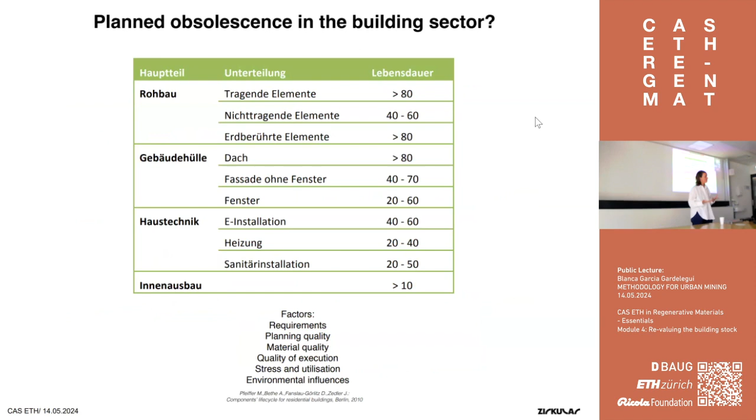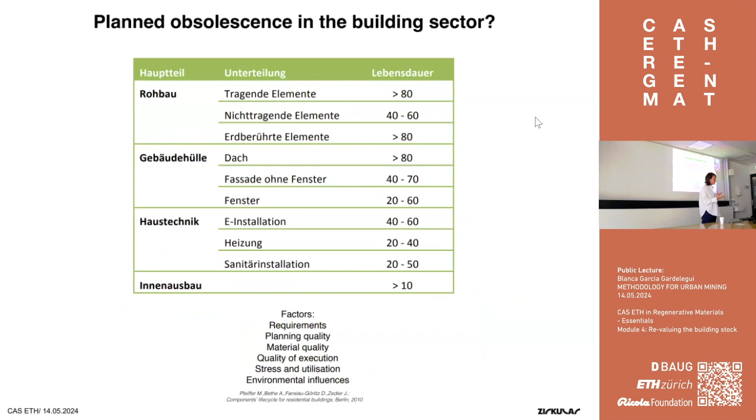A bit of the question where it all starts is extending the life cycle of components and materials. Our first question is, what is the life cycle of components in the building sector, and can this be extended to some extent? Is this something that is set, or can it be re-questioned? Is there a planned obsolescence in the building sector? And the question we also ask ourselves, and where Zirkular also comes from, is how the building sector is now growing.

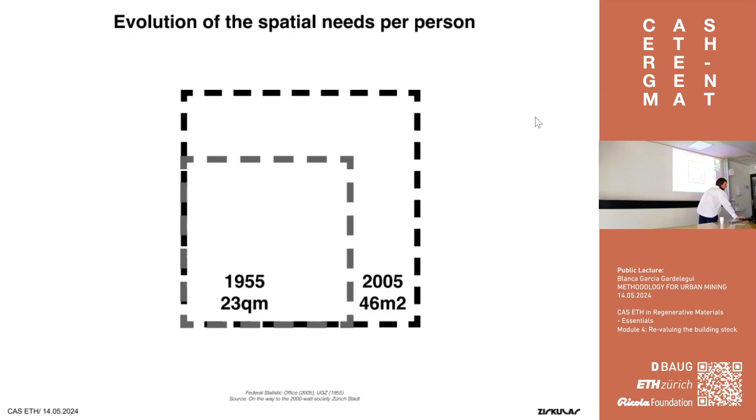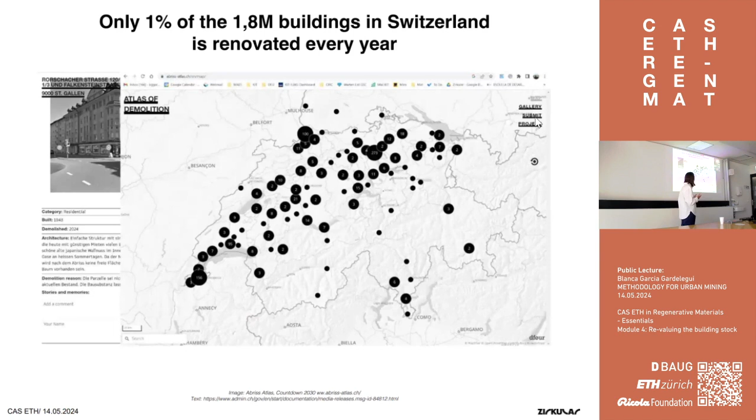So the material consumption we are using per person is growing every year. And it's not growing in the way of renovating the existing building stock and extending it - only 1% of the building stock in Switzerland is being renovated every year, so this is a very, very small percentage.

This is a small introduction to give context on circular construction and on how Zirkular was created. This is also important information on why we work with reuse of components and why we try to reduce construction waste.

There's around 80 to 90 million tons of waste created in Switzerland in general from all the sectors. Out of these, 17 million tons are coming only from construction waste, excluding excavation. Excavation is 57 million tons. So it's very large, more than two-thirds. If you take into account excavation and construction, it's more than two-thirds of all the waste being produced in Switzerland, and this is equivalent to 500 kilograms per second.

To give an idea of how much CO2 is being emitted per second, this is 330 kilograms of CO2 per second. And this is equivalent to, you probably like the new buildings, they emit approximately in the city of Zurich 660 kilograms per square meter, and this is equivalent to one flight to London per passenger.

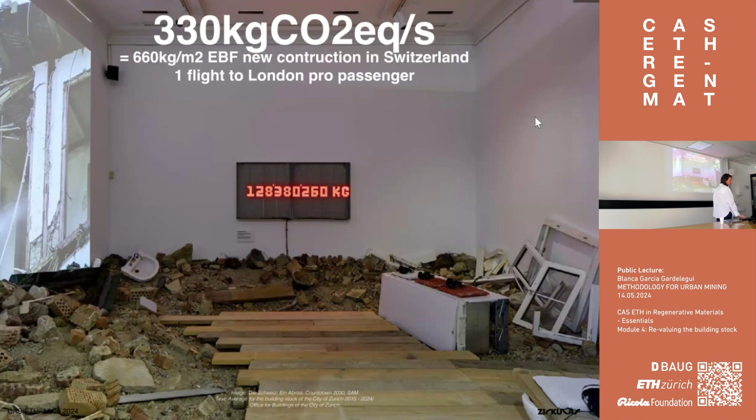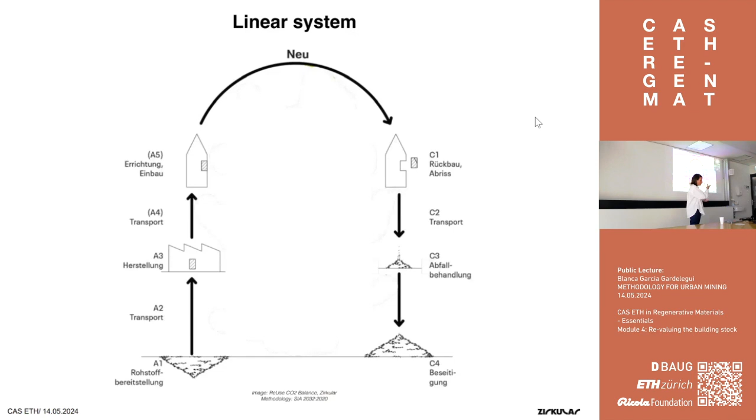This is a bit why we think it's important to work in the topics that we're dealing with. This is the norms following SIA on how the CO2 emissions of products in the construction sector are calculated. So whatever is in brackets is not calculated, but it always follows a linear system, from the extraction of raw materials all the way until the new construction of a new building, and then all the way to the treatment of waste.

What we're trying to do at Zirkular is to keep as much as possible, so to create as little waste as possible. Of course, the first priority is always to keep the building as it is, transforming it only where it's needed, or also adapting it, or when it needs to be densified by extending.

And then only when this is not possible, we try to reuse all the components, so dismantling the building and bringing them to a new building or to the extension. And only when this is not possible, we go into recycling.

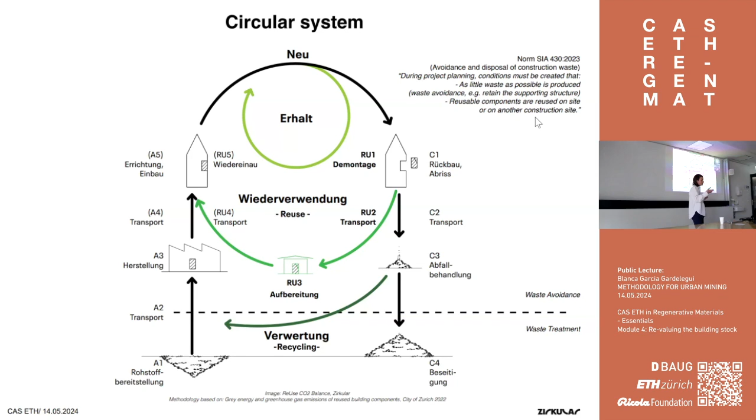It's also important to make this difference between waste avoidance, which includes everything that is preservation of the existing building and of the components, and waste treatment, which would be recycling. According to SIA 430, on avoidance and disposal of construction waste, they really make a difference between waste avoidance and waste treatment. So recycling is part of waste treatment, and reuse of components, and of course preserving the building, is what waste avoidance is meant by.

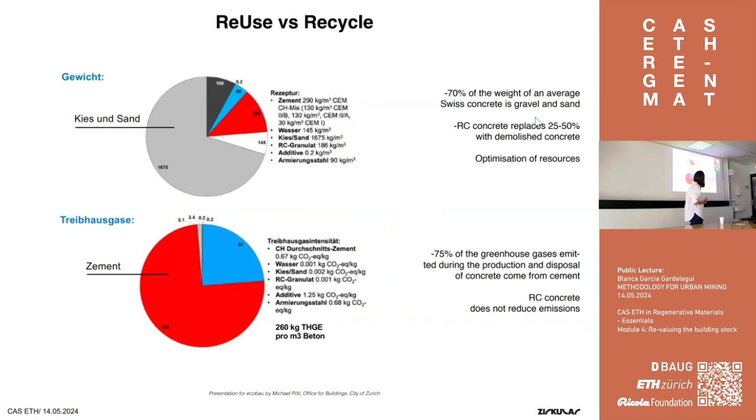Maybe you have seen already these diagrams, but I'll give a little bit of context. This is a bit to understand the difference between reuse and recycle. As I was saying, it makes a difference between avoiding waste, but also one of the important things - this is an example showing the recycling of concrete.

In the weight of concrete, there's 70% which is sand and gravel. When we recycle concrete, there's 25 to 50% of recycled concrete that goes into this, almost 70% of the weight. So this is good because we're optimizing the resources - a lot of part of concrete goes into the recycled concrete. The problem is in the CO2 emissions.

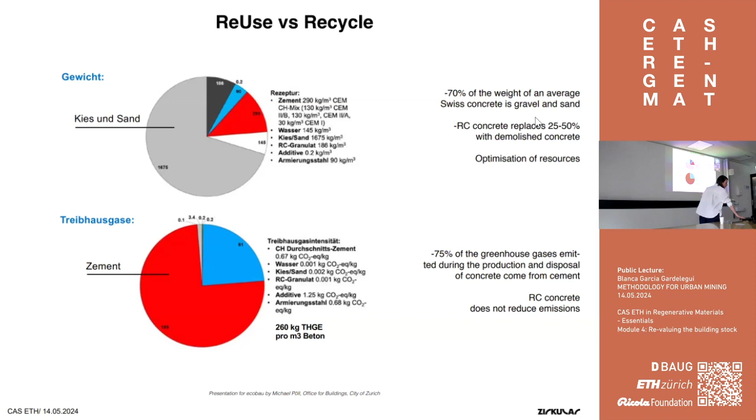What's important is that cement is actually 75% of the CO2 emissions of concrete. And because cement is always new anyway - it's new, or you can change the type of cement - that's actually where we should focus when we want to reduce the CO2 emissions. But that's a bit the difference: when we reuse concrete, we can really make a difference in the CO2 emissions by reducing them. When we recycle, it does not make such a big difference.

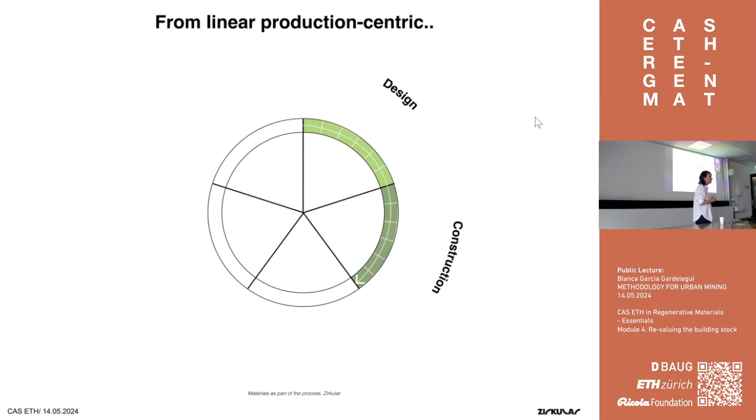Also what we're trying to do, before I jump into the methodology - this is how we usually understand the role of architects, that they do a design and then they build it and then it's done. What we're trying to do is turn it into a circular, more holistic approach, where we're not only coming to design and to build it, but we're also taking into account other parts of the process, like the material procurement.

So where is the material coming from? How is it being transported? What are the logistics involved that can also affect the CO2 emissions and the energy consumption? Then in the design also, how do we design, for example, for disassembly? How do we design with reuse components? How do we build so that it can take as little CO2 emissions and as little energy as possible?

But also that it can be disassembled in the future - how can the buildings then in the future be used, that they can be maintained and that their life cycle can be extended? But also how can they be disassembled, so that they can be maintained in their different layers? And then also the end of use of a building - is it really the end of its life cycle?

Can we not somehow reuse it? And when that's not possible, can we not turn this end of use into material procurement to close the circle? I will now go through the different phases of the whole process and how we work in each of them.

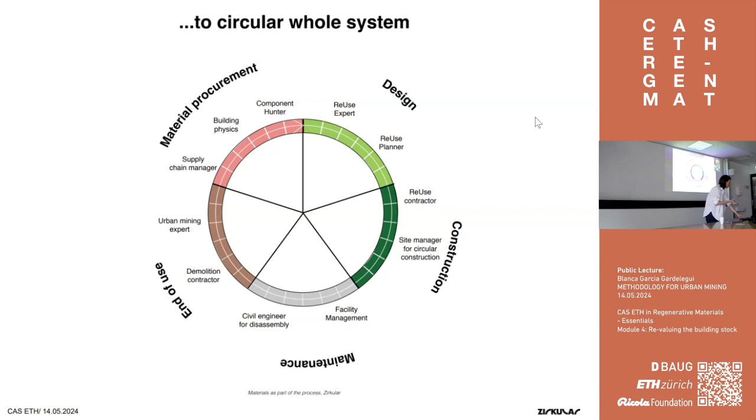So the first one, and one of the most important for us, is material procurement. Where are the materials coming from?

And sourcing the reuse, we usually go through priorities. The idea is that in our projects, we always try to find the components first in situ, so in the building itself.

For example, we're now doing projects with different architects that are renovations of buildings, and what we try to do as much as possible is dismantle the components, for example the facade. Then when the building is done, we remount it. The idea is to find the components already on site so there's no transport in the whole process.

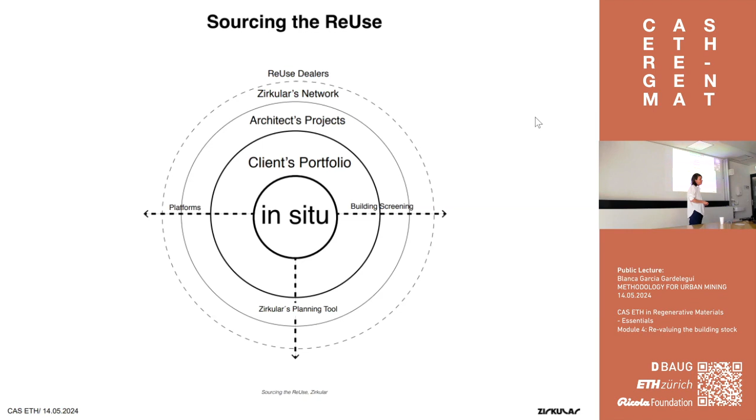And all of this is also done through building screening. For example, we do lots of building screenings of different buildings, and we can use this as a databank for sourcing material, but also through platforms, since there are many online platforms with reuse components. We've now also developed a planning tool, where the idea is to use this for sourcing materials too. This is one example of what we're doing right now to source materials.

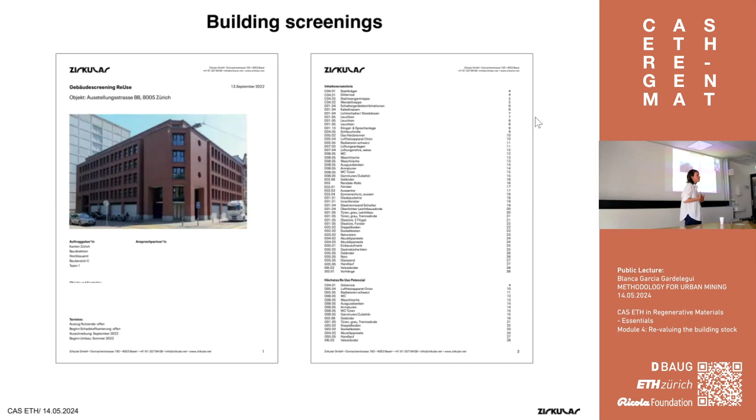So this is a building screening, which is starting to become mandatory in some countries. Hopefully in the future it will be obligatory that before you demolish any building, you have to do a building screening, where we assess every component from the screening.

We describe, for example, what is the reuse potential, does it have toxic components, what are its dimensions, its description. With this, we can assess which components from the building don't need to be demolished and would rather be disassembled.

Another important part of our methodology is the databank. Right now we're working with very complex Excel sheets for all the components we find. We have many source objects where we find lots of components, and these all go into one Excel. Then we have another Excel with all the components we're looking for. In this databank, a match is done between both. It's quite complex at the moment.

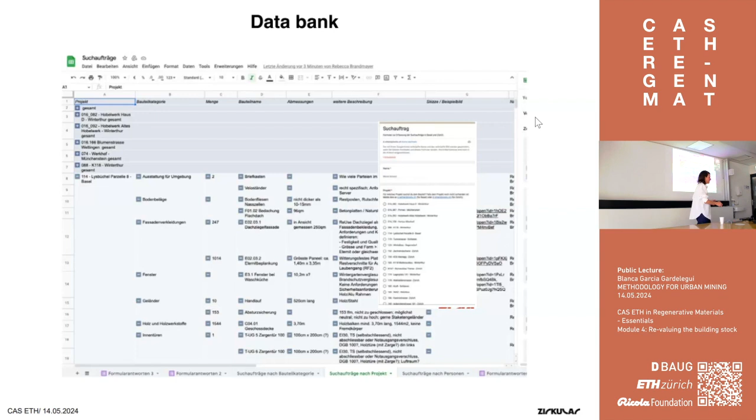This is the matching: what we're looking for and what we have found, and we try to match between both of them. This is the application, the planning tool, which has been developed over two years now, and which we're currently testing in our projects.

The idea is that we no longer have to work with super complicated Excels and a Google Drive full of millions of files, but that everything is in a nice interface that our clients can also use. That's where we're heading very soon.

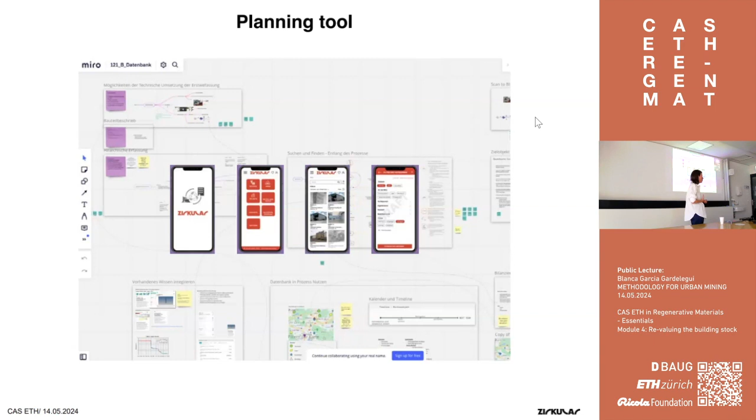And of course there are all these platforms like Salza, Use Again—I don't need to go through them, there are many, many online platforms. Yeah, please.

It's a good question. We have many different types of clients. We work a lot with the city of Zurich, with the city of Basel, with public projects, because very often they can be more pilot projects and we can explore the reuse idea more. But we're also working with architects directly that are interested to implement reuse, for example Genossenschaften who want to do reuse. The problem, which I'll get to later, is sometimes it's more difficult with credit, because the credit needs to be available earlier in the process, so it's more difficult with conventional projects. We also do competitions a lot, consultancy in competitions with architects, and many other projects that aren't with architects.

Another way of sourcing material is to look at the plans of new buildings being built in the city, because where there's a new building, there's also a demolition site. That's, of course, not ideal, but when the demolition is already going to take place, then we can work with it.

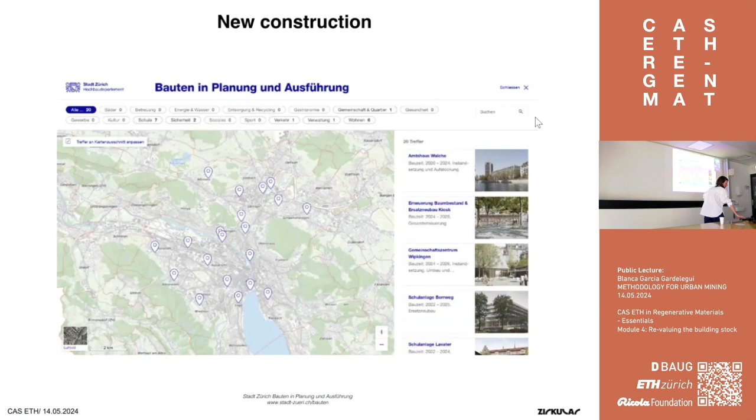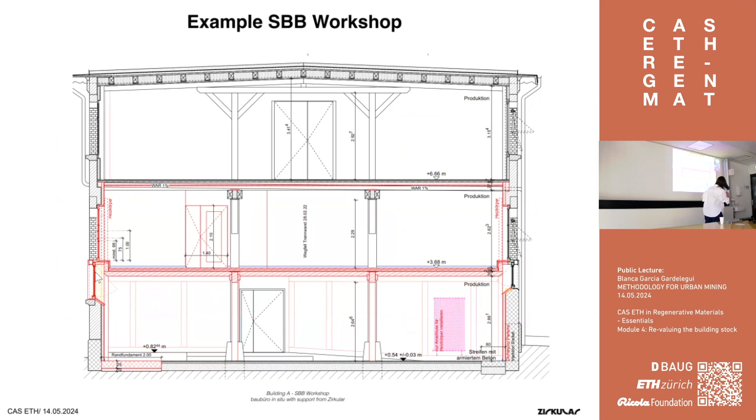Here I'll show a small example. This is the SBB workshop, where we worked right across the street from this building, done with baubüro in situ. We helped them with the CO2 calculations and finding the material. It's an old Halle, and the idea was they wanted to remove the slab of the second level, to make a new level on the first floor.

For this, they needed a new structure, and they also needed to cut one of the existing concrete slabs. Instead of demolishing this slab—since it had to be dismantled anyway as part of the existing building—the idea was to cut it into concrete pieces and use them as foundations for the new slab being built. These brown pieces are part of the existing slab that was already on site. What's very good about this is that no transport was needed to move the pieces, since they were already there. It was only a matter of cutting them, which also made the whole dismantling process much cleaner.

This is what it looks like. What you see around the reused concrete pieces is new concrete. This was done quite fast.

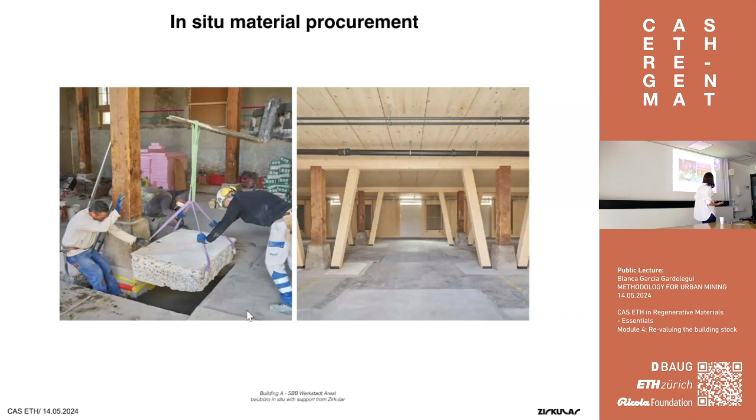What's interesting about this project is that sometimes, because there's not a lot of time to implement these projects with reuse—since we need to reduce CO2 emissions—we end up doing a bit of applied research, testing things out. In this case there wasn't much time, so there were things we think could be optimized. We also find it interesting to do a scenario afterwards on how it could have been optimized.

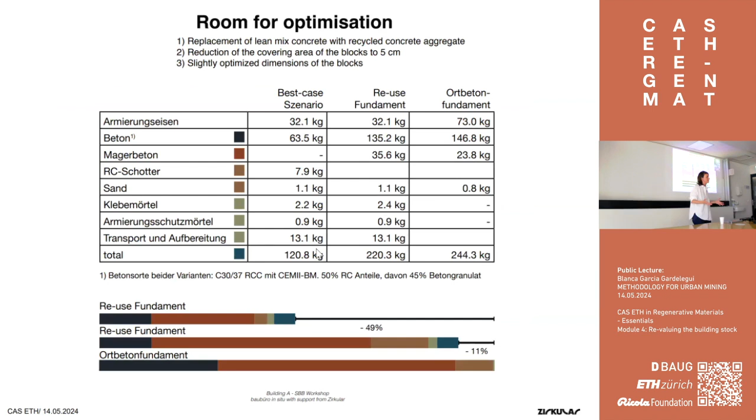When we compare new concrete foundations with the reused foundations that were done, there's only an 11% reduction in CO2 emissions. This is because a lot of new concrete was poured in the connections. If we'd had more time, or for future scenarios, we would replace the lean mix concrete with recycled concrete aggregate, reduce the covering area around the blocks, and maybe cut them in a different size. Since this is a bit of applied research, we always try to see how it could be done better next time.

Here's another example of a component and material procurement we're almost finished with: the Kerenzerberg tunnel. It's a tunnel that is 5 kilometers long and has already been in use for 30 years. Because of the norm, they needed to create an ancillary exit from the tunnel, and the construction of this would take around one year.

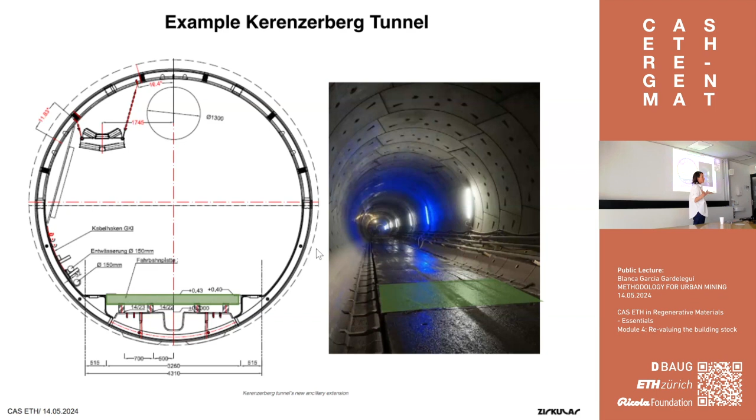In order to build it, they needed these concrete plates, which are 4.5 tons each, and there are 2,000 of them. They needed these concrete plates for only 1 year, and then done. There were also 20 kilometers of wooden beams, which were also only placed for the construction, and then after 1 year, nothing.

We did some tests. They contacted us, and we did some tests with a Structural Xploration Lab from EPFL. What was interesting for their analysis is also that these concrete plates were not done with normal reinforcement, no? They were actually done with plastic reinforcement, which makes it very easy to produce because you can insert them. It's a very innovative solution.

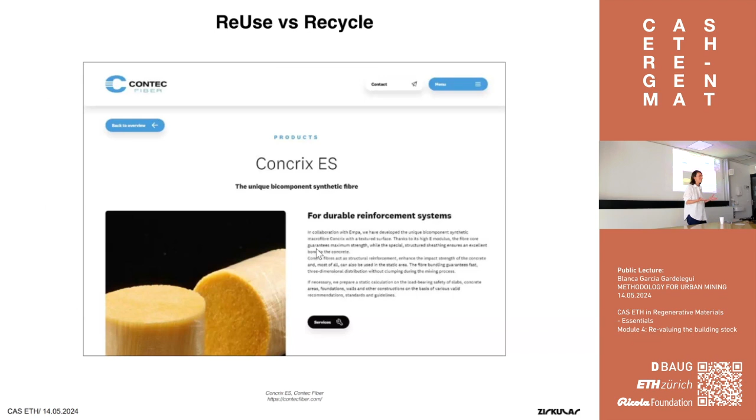The problem is that it's not yet known how to recycle them, because when you put the concrete under a very high temperature, the plastic melts. It's not possible to separate the concrete from the reinforcement. So that was also why we were contacted, because it's very expensive to get rid of these plates since you cannot recycle them. You literally have to send them to the depot.

There were 2,000 of them, so we tried to place them in different projects because it's also a very valuable material. They were 22 centimeters thick, almost 3 by 3 meters big. So we tried to place them in different projects, and of course, in every project, they would ask us for different requirements.

So we need a Druckfestigkeit test, this was one of them. We need a slippery test to see if you can use it as Bodenbelag. We need a Druckfestigkeit test to see if they're strong enough to support, for example, vehicles. We need... etc. I won't go through all of them.

But one of the tests that was interesting, I won't get too much into detail to not make it too geeky, was that the salt that would be put in the winter so it doesn't become slippery would disintegrate the concrete, because the concrete was not thought to be used as a floor finish outside. So in all the projects where we wanted to place them as floor finish, the analysis showed that we were not able to put salt on them.

And of course, all the clients said, we cannot control that. In 5 years, someone will come and put salt on it. The problem is that then the concrete degrades a little bit, and then what happens? It's very little, we don't really know exactly how much, but then the problem was that the plastic hairs would come out.

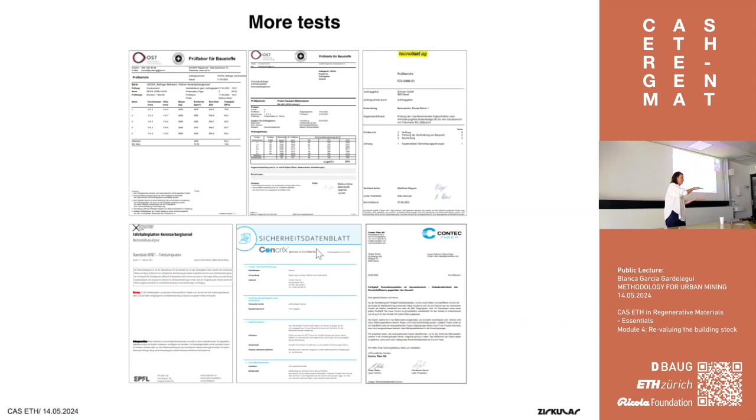Another interesting test, for example, was the slippery test - they tested both sides of the concrete plates. And unfortunately for all of us, the upper side of the plates was not good enough for the slippery requirement, but the one below was good enough. So that meant that if we really wanted to follow this, we would need to turn all the plates around.

This is very complicated because the anchor points of the tunnel plates are only thought to be carried in one direction. So to turn them around, you need to create a very, very complex system. So this is still in process in some projects, to see what will happen.

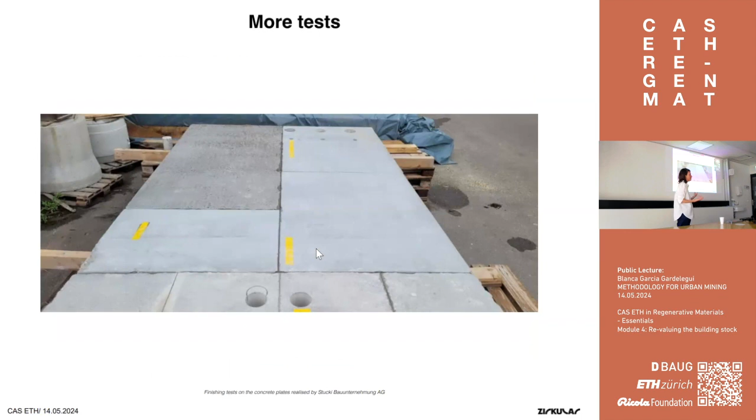We also tested, for example, sanding them in different ways, to make them have different finishings exactly for this slippery idea - how much would it be per square meter if we wanted to sand them with water, pressure, or with different treatments. But this was quite an interesting process.

And this is the first concrete plates being installed. This is the temporary cantonal school in Uster of the building department of the canton of Zurich, where 88 of the plates were installed directly without any storage in between. They were brought from the tunnel directly into the school and installed.

Sorry, I thought it was clear. Here, so they're the floor finish. They were used as floor finish, but also as the slab of the balconies.

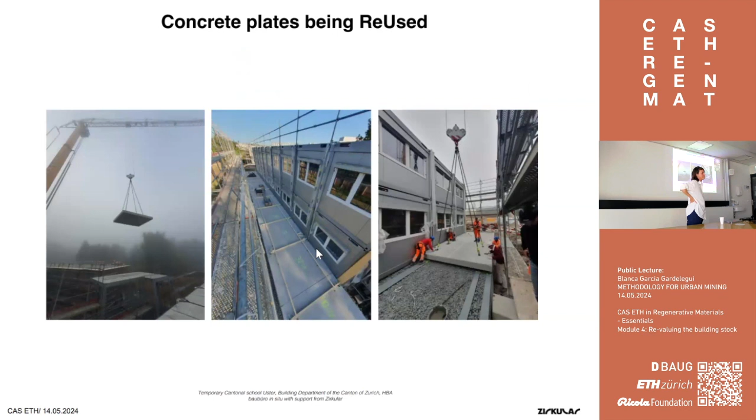The idea here, which I cannot yet confirm because it's still not implemented, is to use them also as floor finish and as foundations maybe.

So that was the material procurement, then I go to the design. We don't design ourselves, but we do consultancy with architects, and look at how to design with reuse from the start.

There are basically two ways of designing with reuse. One is when you already have a project—architects that want to implement reuse come to us, and we see which components could be found and how the design would have to be adapted to them. The other way is when you have a catalog from the beginning with reuse components, and you do the design from the start with these components.

We're very interested in this approach of designing from the beginning with reuse, because then the design doesn't have to be adapted to the reuse. I think this will also change very much the aesthetics of reuse.

One idea now is that reuse brings a bit of a collage aesthetic, because you get the materials you get and then need to adapt them to the design. But it's different when you design a project from the beginning with a catalog of materials, and that's what we're now testing with applied research.

There were two competitions done, one with the City of Zurich and one with the City of Basel, where we created a catalog of components with the city, which was the base of the competition.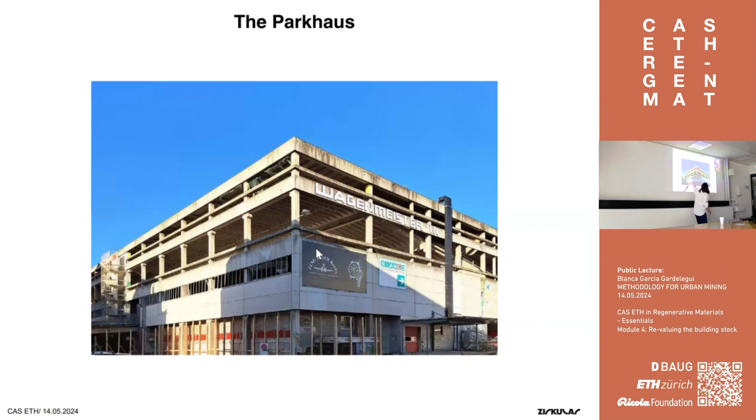What's also interesting is that they reused the columns of the Parkhaus—you can see them here. These are the same columns that were in the park house, but of course the height required for housing is very different from the height required for parking.

Housing requires much lower height, so what they did was use new connections in between the columns to adapt them to the new heights housing requires. This is one of the principles we use a lot in reuse—we always use new pieces to make the connection between reused elements.

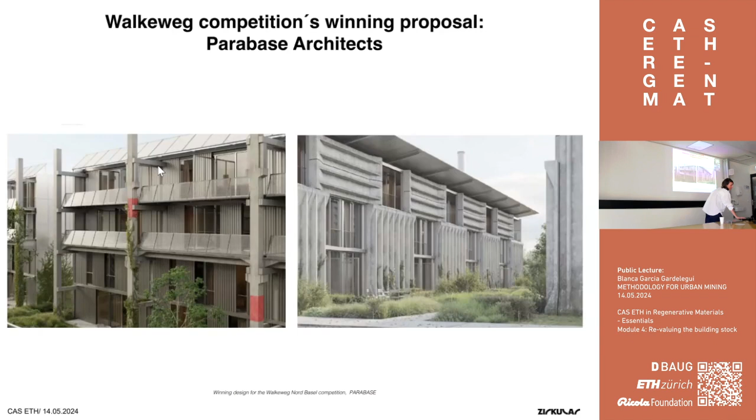Then I'll explain a bit about the City of Zurich competition for the ERZ Recycling Center, which was also being done in parallel, creating this catalog. Here there were five or six different mines, and the idea was similar—to build a recycling center out of these components.

As you can see here, you could actually shop for components—say, I want to use 110 linear meters of IPE 300—and you would automatically see how much CO2 you were saving by doing this.

There's not really an official way of calculating CO2 emissions from reuse components. We only have right now the experience from K118, the building done with reuse in Winterthur, which I think you will go visit—tomorrow, exactly.

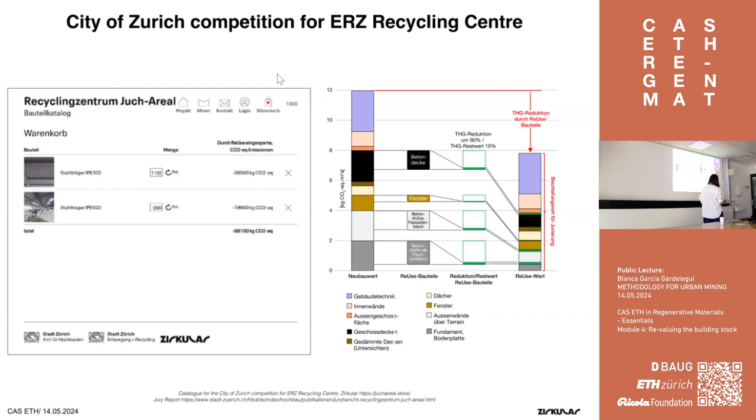And that's a bit the comparisons of the THGs, of how much it would be reduced, and all the competitors at the end had this sort of reduction of the CO2 emissions. And a bit to show also how the designs were varying.

So one of the topics where there's sometimes a lot of skepticism is that if everyone has the same catalog, all the designs will look the same, because everyone is using the same mines to design these projects. This is a bit to show how different all the proposals were.

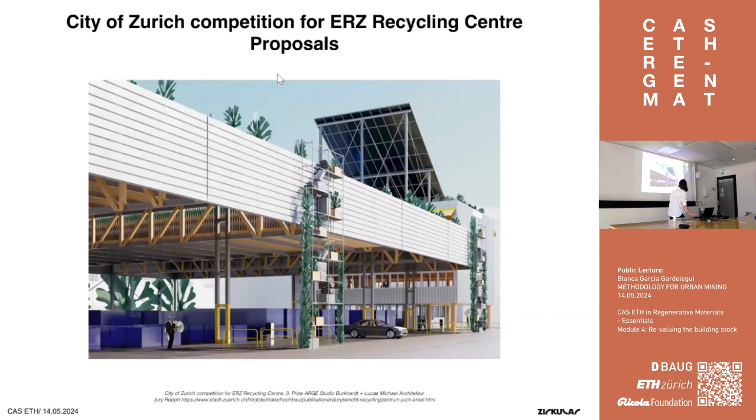This is the second prize for the competition from Studio Hammer. And this is the third prize by Studio Burkhardt and Lucas Michael Architects. With the same, out of the same catalog, something completely different can be done.

And this is also one of the proposals, from Studio Mitassemble. And that's the winning proposal by Graber Pulver Architects, but a bit to show what a variance of schemes one can design. So it's not that the world is over for us architects - there's still a lot of spectrum in the design to be done with reuse.

You can see also, for example, that they use this idea of new buffer elements to make the connection between reuse. Because the steel columns are all a bit different height, the new concrete pieces are assuming this buffer function. The same way that Parabase was doing it in the columns - this is something we do a lot in reuse.

And this is also a diagram from Graber Pulver Architects from their proposal, where these are some of the mines that they were reusing. They used some mines from the catalog, but they also brought one mine from their own knowledge that they knew would work in terms of time, the Schneiderhalle, and what they want to do with all of them. What's interesting, for example, with the recycling halle, they wanted to build it 1-to-1, so dismantle it as it is and install it again exactly how it is.

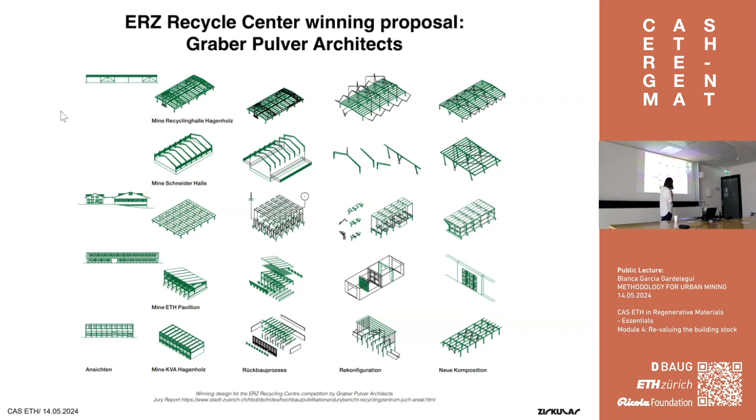So there's a lot of steel being reused. There's also concrete being reused, so in situ concrete being taken and reused, and then also wooden structural components. So that's also where most of the impact comes from.

And here in the implementation, you will see then tomorrow the K118, but these are some of the strategies that were used in the K118 by Baubüro in situ - some of the strategies that we also use very much when we design with reuse and for reuse.

So for example, one of the ideas is to never cut the components specific to the needs. You always leave them the size that they are and then they overlap, because the idea is to not create dimensions that are just touching each other, so that you can also reuse them in the future. That's why, for example, in K118 - I think Mark will explain it better tomorrow - the idea is that the facades here are overlapping each other so that they don't need to be cut to a specific dimension.

Also, of course, the selection of materials is important, so that we always work with robust raw materials. For example, here there's not a photo, but the parquet was reused, and the idea is that parquet you can just sand it.

I will now go through it a bit in detail with the costs. I will show a bit of an analysis of the experience that we have had until now. But the idea is also - I will get to the cost - but the idea is also to make all the systems separated, so that they can be separated from each other.

So for example, that the facade, if it needs to be repaired, you don't need to dismantle the whole structure - you can just dismantle the facade. Or if the staircase needs to be repaired, or if something is not working, that only all the layers are separated from each other.

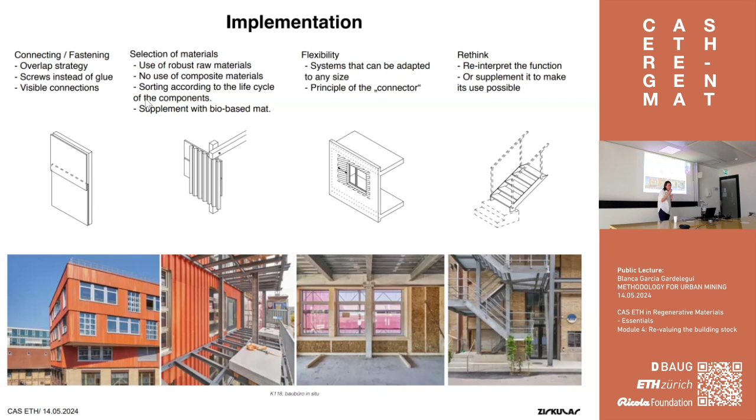The stairs were also reused in this building, and then they didn't have the same height as the steel structure, which was coming from another building. So there was this concrete podium done just to make it adapt. But also the steel structure had some connection details making these new buffer elements between pieces.

And I go to the construction. So how is the process different? Reuse compared to a conventional project. These are the stakeholders, so the stakeholders are very different.

We always like to say that there's new professions that are being created, but it's true. In Zirkular, in our team, we have a team of component hunters, Bauteiljäger, who go through all the demolition sites trying to see what has potential, doing these building screenings and trying to find treasures in these buildings that we can implement into projects.

But there's also, for example, site manager for circular construction, which is very different. There's also civil engineer for disassembly, but also the expert for disassembly - it has to be someone specialized that knows how to do it. It's not the same thing to demolish a concrete building than to

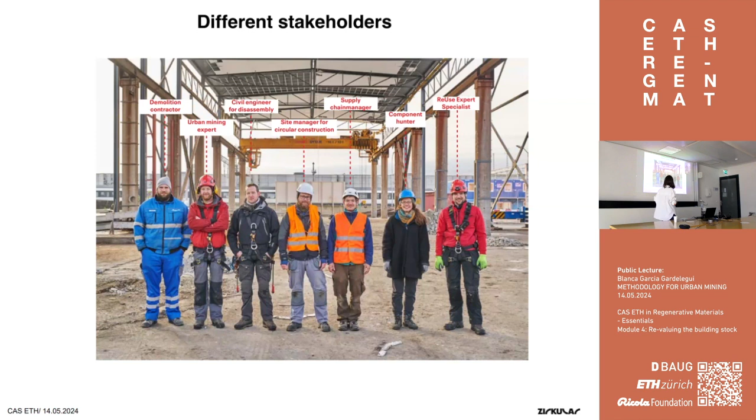deconstruct it - cutting the concrete and so on - or to disassemble, for example, a steel structure. I will show some examples, but it's also something quite specific, and now different companies are getting specialized, so the demolition contractor, and so on.

And these are also the different milestones. This is the construction process compared to the normal SIA phases.

What's a bit special when we work with reuse is, as I was saying before, that the credit needs to be available a bit earlier in the process. So either if we want to start working with a catalog, all the tests of these components need to be very early in the process. This is a budget or a credit that needs to be invested into the project before the project is even there. So that is already something.

But even when we try to implement reuse in projects that are already designed, the credit has to come earlier. We need to start looking for components as soon as possible, because, for example, in K118, the steel structure that was found did not have the right dimensions, and the whole sections, the whole drawings had to be adapted to the structure that was found.

The idea is that we start looking for the components as soon as possible. But of course, usually in the SIA phases, the credit for a project only comes once the BAU project is submitted. Ideally, once the BAU project is submitted, if we then find a steel structure that has completely different dimensions from what we're looking for, this is very difficult after the BAU project. So we always try to have this credit earlier on in the project.

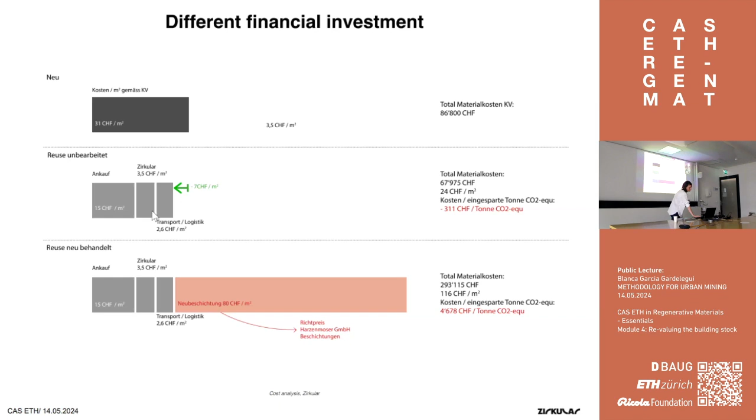This is what we usually do - I won't go too much into detail to not make it too heavy, but this is a bit an overview of our process. Usually we divide our work into 2 phases. The phase when we get these projects that are already in a project phase, for example, we do a phase 0 where we do a potential analysis.

So we do building screening - if there's an existing building, we do a building screening. When there's not, we don't do it, but we do a potential analysis. So we see which components have potential to be reused in the project, and we go through a list of all the components where we see potential. Usually we try to do a top 10 or top 5 where we want to focus ourselves. Usually we can choose doing a CO2 analysis or how much waste can we avoid by reusing these.

This would be the phase 0, so until the first line. By the end of this, we do a top 5 or top 10 - the components that we think could be reused in the project. And we do a search profile where it's stated, for example, we want to find 35 windows that are between 2.3 and 3.2 meters each and that have a U value of something.

And with these search profiles, we start looking in our mines. When we find a mine where there's a good match, we do an Erwerbsantrag where we compare costs - the new price versus the estimated price of the reuse component. If this is approved by the client and the other consultants, then we do all the coordination of dismantling, transport, and so on.

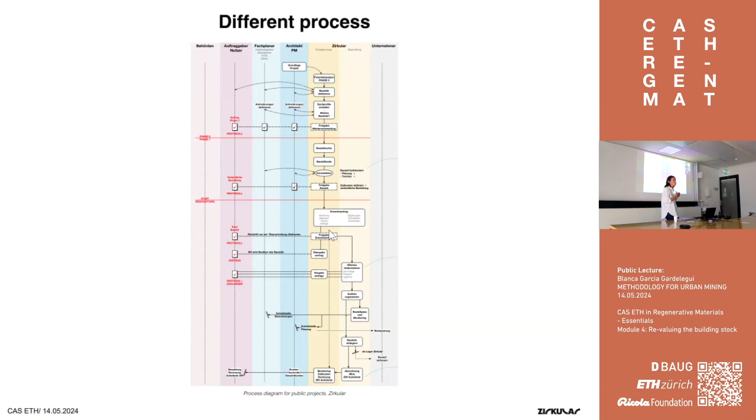There's lots of platforms online. The ones I showed, some platforms like ReUse Again, there's different platforms. The idea from Zirkular now is to make an alarm system, so you can sign up - for example, I want windows - and then every time a window comes up on one of these platforms, you get a message in your email.

You can ask the Bauteilbörse, and you could call them and say, hey, I'm demolishing this big building where there's this and this, are you interested to come by and check it out? And then they could make a visit and assess whether there's components they would want to take.

So this is a bit the steps we go through in one of these projects, where the architects already have the full project and they want to do reuse in their project. We then do a first potential analysis in this phase 0, which I mentioned previously, and we go through the whole list of components after EBKP, to see what has potential to be reused.

Sometimes, for example, for some projects we've also done a CO2 comparison - which components could have the biggest impact in the project in terms of CO2 reduction, or in terms of material reduction - based specifically on the project. There's many things that can change depending on the project, many factors, and this is one example of how we chose these top 5 or top 10.

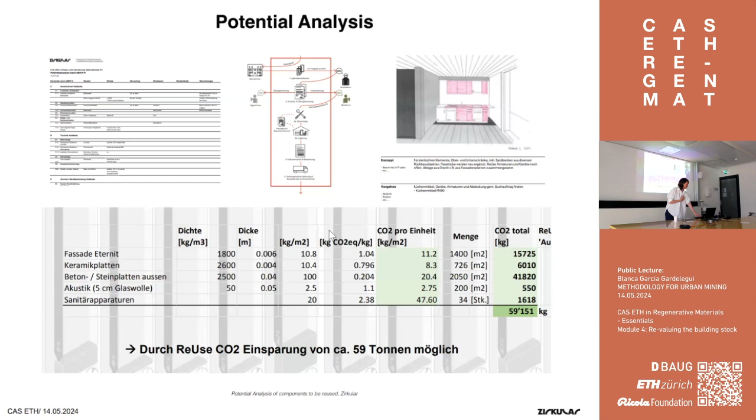This depends a lot on the client. And then once we have these elements that we want to reuse, that we want to search for, we create these search profiles. The idea is that these search profiles are as open as possible - the more flexibility we have, the easier it is to find the component.

This is an example, like I already mentioned before, the windows - if we say we want a 2.03 meter by 2.1 meter window, it will be almost impossible to find. So the idea is always to make an in-between, and also to specify other things, for example which U value does it need to be, does it need to be triple glass or single glass.

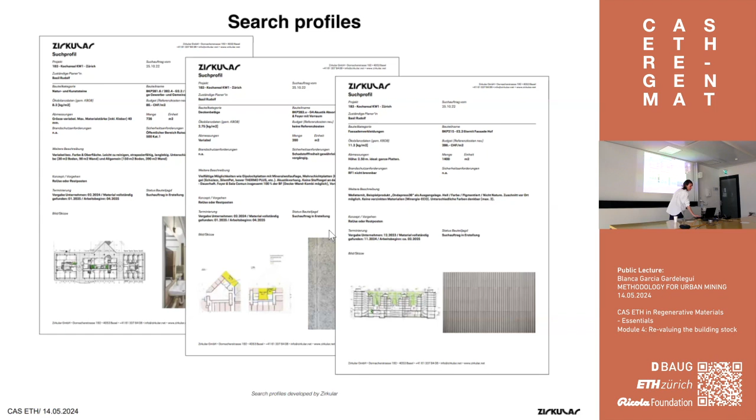Dimensions, so that all the requirements are stated, and also until which date they need to be delivered to the construction site. With these search profiles, we can then start searching for components.

This is also important to find the right match in terms of timing, so that there isn't 10 years of storage in between, especially if we need to pay for storage. This also speaks against the idea that the project doesn't need to be adapted. For example, when the concrete plates were found right on time for the school, the whole design had to be adapted to them, meaning tons of redrawing. So it's also not always best to find them right at the same time—though of course it's good if it doesn't require changing the design.

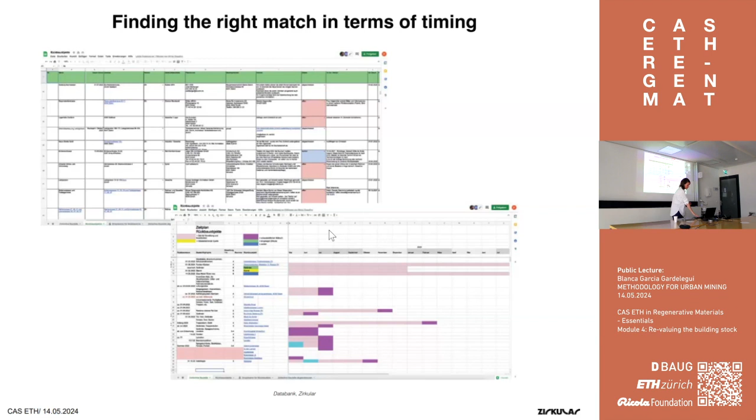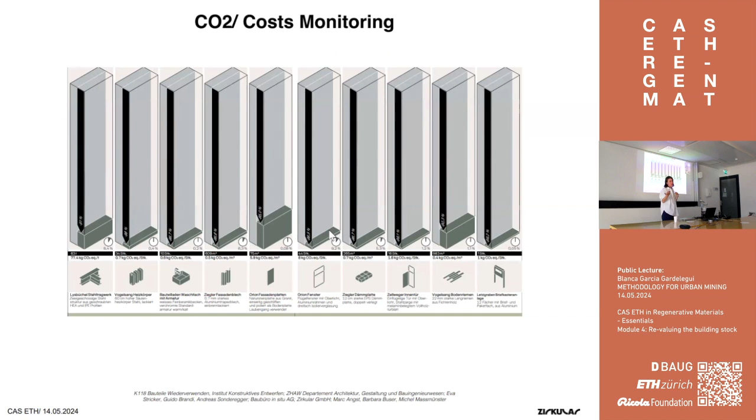At the end, this is what I was saying before—you can find this comparison in the book K118. There's a CO2 comparison and a cost comparison on the difference between the new component and the reused component. You can see how much CO2 was saved through the reuse of steel, how much through the reuse of heaters, and how much more expensive or cheaper the different components were.

Then there's the use phase—how to extend the life cycle. This is the diagram, maybe you know it, by Stewart Brand, the Design for Disassembly diagram. The idea is always to separate the different systems that have different life cycles. For example, the structure, which can last up to 200 years, can be separated from the skin, which maybe lasts 40 years or so. This is important not only for design for disassembly, but also for maintenance, so we can repair different pieces without having to demolish the whole building.

This is an example from last year, the St. Gallen Provisional Theatre, which was built as a provisional theater while the St. Gallen Theater was under construction. It was meant to be there for 4 years. It was a beautiful building, all out of wood, with a metal sheet facade. They could not find a further reuse for it, and the cost for dismantling was 400,000 francs. We tried to reuse all the components in our projects.

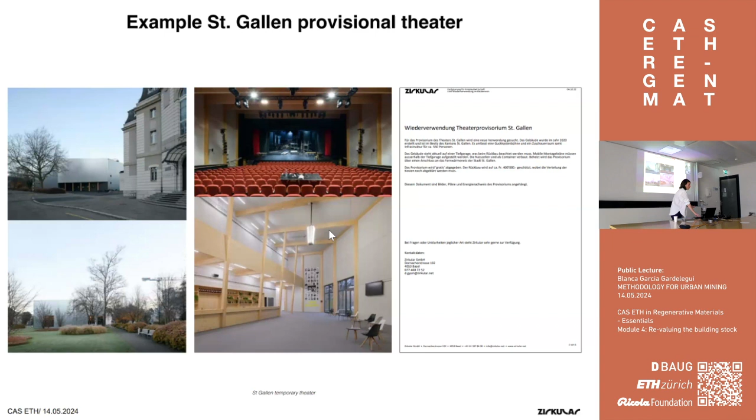Of course, our first priority was to reuse it as it was and not dismantle it at all. But there was a date set for demolition, and if nothing was found for it by then, it would happen anyway. So we were trying to find a use for it elsewhere, and everyone was quite worried about it. Then, this year, a city called Ingolstadt in Germany adopted the Provisorium Theater—it was dismantled a couple of months ago and driven to Germany to work as a provisional theater there.

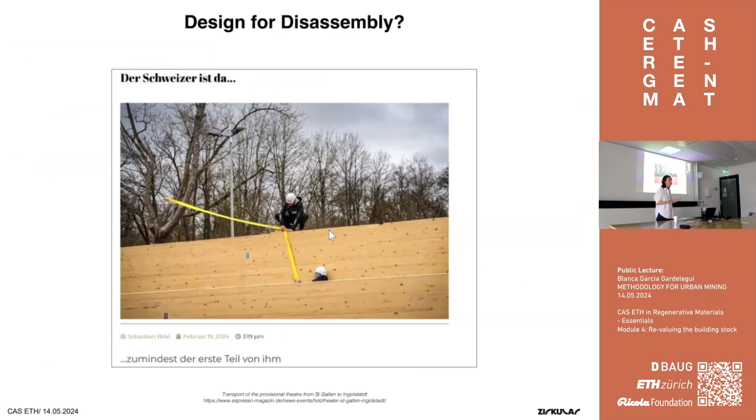So this idea of how to best extend the life cycle of these components—always, as much as possible, keeping the building as it is. This is already in the process of reinstalling the theater.

This is another project we did with David Vaner Architecture—a Basel Cantonal Bank where the facade needed some refurbishment. The question was whether there should be a new facade, or whether it was really the end of its use, or whether we could rather refurbish it. The idea was to keep as much as possible. Some principles were: energetic improvement through better insulation, only replacing one of the glass panes, doing all refurbishment on site so there's no transport, and reusing as much of the facade as possible.

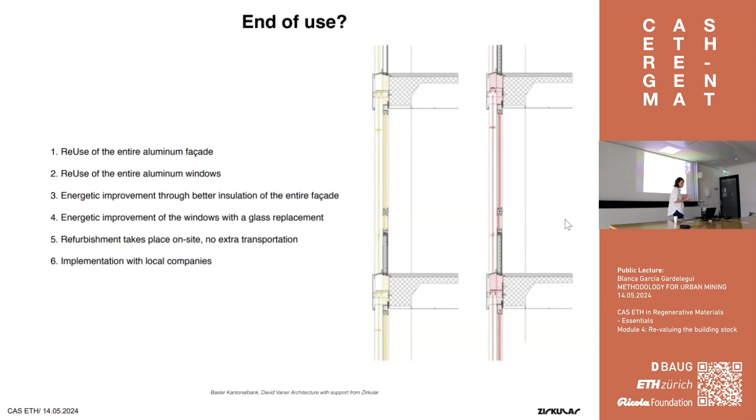So basically the idea was to dismantle the facade, put more insulation where needed, add one extra layer of glass, repair the storages also, and create as little impact as possible, do as little as possible. And yeah, the whole facade was dismantled and then reinstalled.

And I come to the last chapter. So we go back to end of use, where are the materials coming from? And this is a bit what we do when we find a building that is going to be dismantled. So the first is an analog inventory, where we assess the potential that the components have. When it's small components especially, it's just analog, so taking the dimensions, seeing the potential that they have.

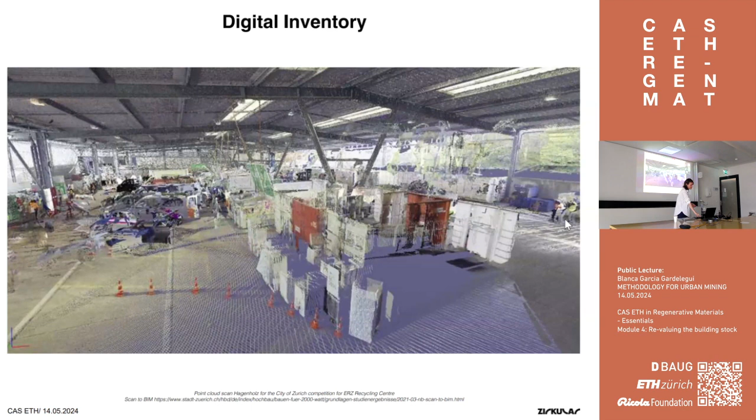And some components that are more difficult, like a steel structure, require a digital inventory. So this is a scan to BIM that was done for the point cloud scan for the Hagenholz, for the City of Zurich competition for the ERZ Recycling Center. And so that we have done also for a few projects. I mean, we have not done them ourselves, but this is also assessing the demountability.

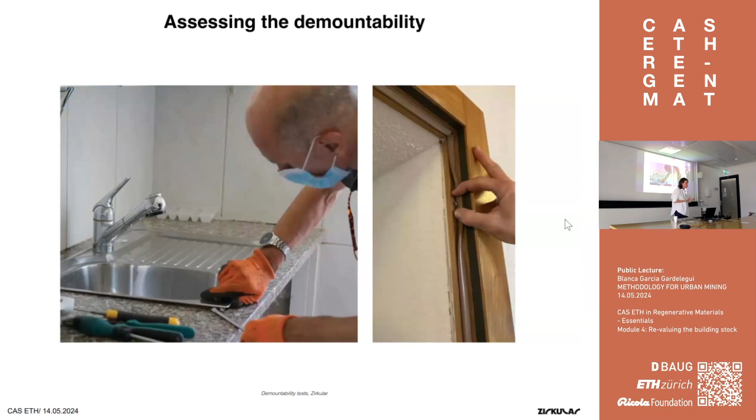So there's components that are very easy to dismantle. For example, with windows, one can see very easily which ones are very easy to dismantle and which ones will be more difficult. With steel, for example, sometimes it's a bit more difficult. I will now show one example. But this is also something that you need specific people, professional workers that are trained into this.

And also something that is a bit specific to reuse is the tendering for deconstruction. So how is this written that it assures the deconstruction, the well-done deconstruction, the professional deconstruction, and not the demolition. This is an example, a dismantling concept that we did in a mine in Plattenstrasse for the radiators.

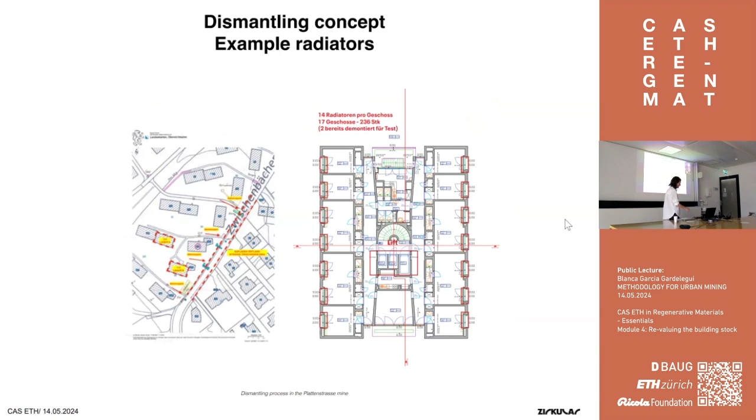So exactly where are all the radiators that we want to dismantle? And then the professional dismantling. So how should they be dismantled?

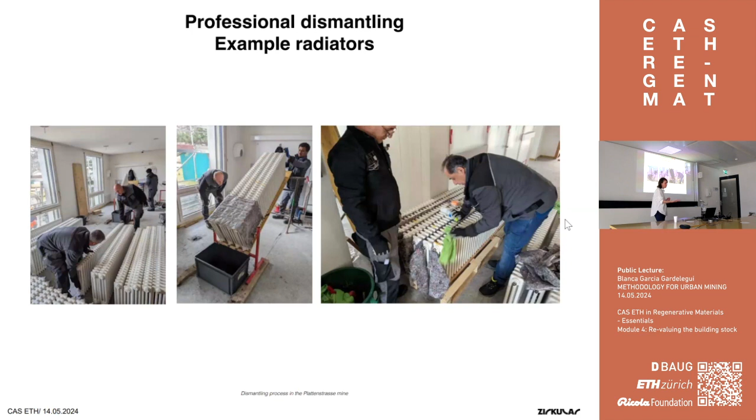For example, these radiators, as soon as they're a bit bent like this, the tubes that are inside, they break. So it's very, very important, when they're being dismantled, to keep them completely straight so that the tube inside doesn't break. And this was, for example, one of the problems. So it's very important to have people, workers, that are professional, that know how to do this, because it's not the same as normal.

And then also the tagging inventory. So for example, with radiators, maybe it's not so specific, but here there were radiators with different dimensions, and it's important that they're stored in a way that they're easily identified afterwards.

And yeah, the professional storage, no? Like how should they be? For example, here, in order that there would be no weights on top, exactly for the problem I was mentioning before, they were also covered with a frame.

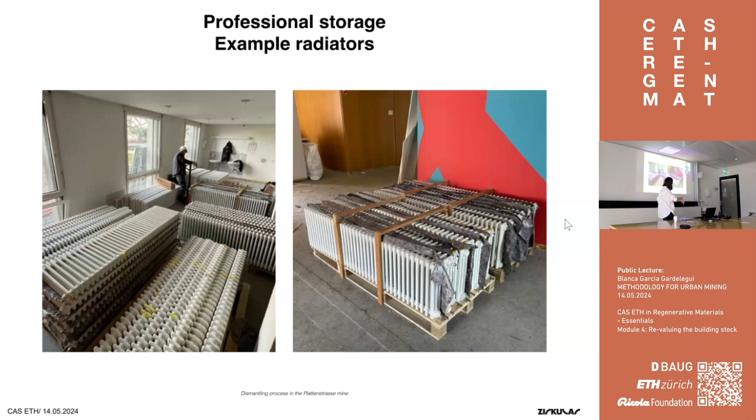And maybe this is a bit more of a complex example. This is the dismantling of the Schneider warehouse, which you saw before in the competition proposal from Graber Pulver Architects for the City of Zurich competition for the recycling center.

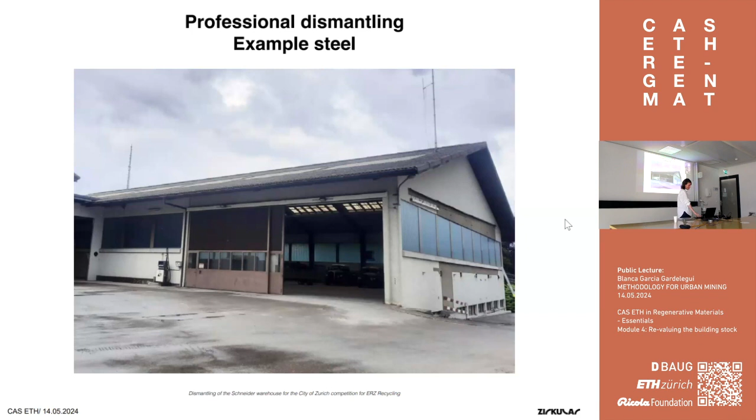And this is basically the project that they proposed to dismantle and to reuse, so that we could reuse the steel structure in the new recycling center. And this is how it was done. So basically, all the facade, everything was taken away, and this is the steel before being dismantled.

And this is another mine. So in this case, you can see that the steel came out very, very clean. There were no problems at all. The facade, as we said before, was designed for disassembly, very easy to take away, and the steel came out very clean. And this is another example where it was more difficult.

This is the Stratego office building, also for the same competition for the ERZ Recycling Center. Here, for example, it was actually a video, but I think it doesn't play, that's why it's a bit blurry. But here, for example, some of the steel beams were in between the concrete.

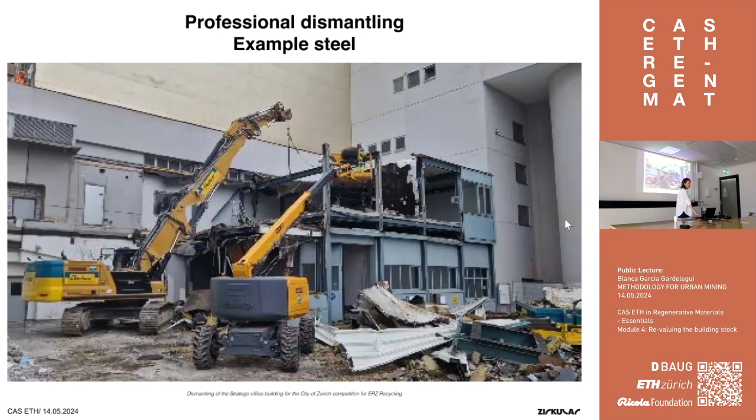So when they were cast into the concrete, and when they tried to then dismantle it, it was quite difficult for some of them. So it's also, as I was saying before, the dismantling is quite specific and it needs to be designed, and sometimes there are difficulties.

Something quite special in reuse is this tagging or inventory. For example, the recycling center will be built in the competition of the city of Zurich, rebuilt 1-to-1. So it's very important how we tag these components to make sure we know which component is which column, but also how they were placed.

For example, this is the Schneider warehouse I showed before. What's interesting is that the columns were already tagged, engraved with a tag, so we could already know which columns and which beams we were talking about.

The problem is that the nodes were not tagged. So we knew this column was this column, but we didn't know if this was the top or the bottom, or if it was placed like this or like that. This was important for the future.

So then what they did was use other tags to show the connections. For example, this is connection 10.1. So then we know this column was placed like this and not like that.

This is also quite complex. For example, the Schneider warehouse will need to be sanded, and how this will be done with the metal plates seems like it's not a problem. But for the next one we've discussed a new way, done with plastic tagging until it's taken to be sanded. We're actually doing this in another project in Basel, for Basel City.

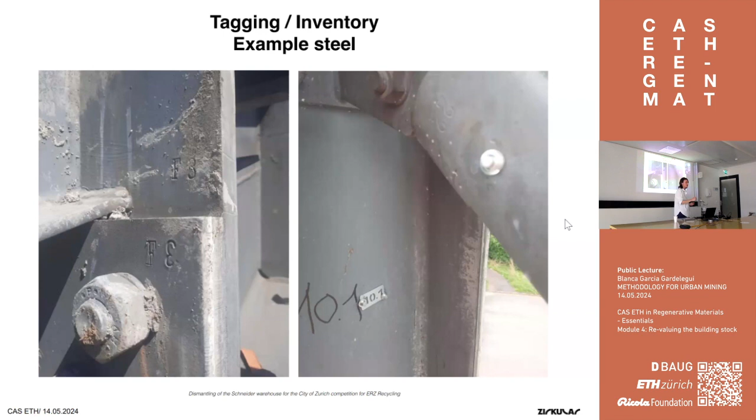And this is also the plan. That was also a bit complex, because we had the original static drawings, but we needed to draw also all the information about these different connecting points.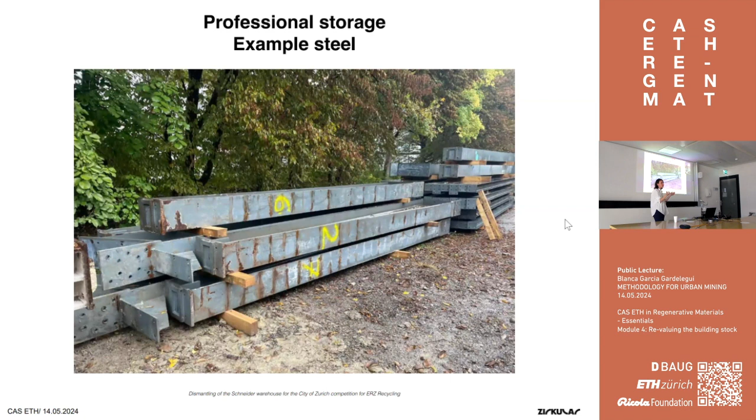Then also the storage - how they're stored is also something quite specific. How do you make sure the water doesn't get in? For example, these columns had a very special geometry, so how do you store them?

The water doesn't get through, but also they need to be covered to be protected from the rain, while at the same time being ventilated - it's quite specific. As it's not yet under norm, we need to speak to a lot of people from BAFU to really understand the recommendations, as there isn't really one way to do it right now. This is also the steel from the other mine you saw that was a bit more difficult to dismantle, so it also made it to the site.

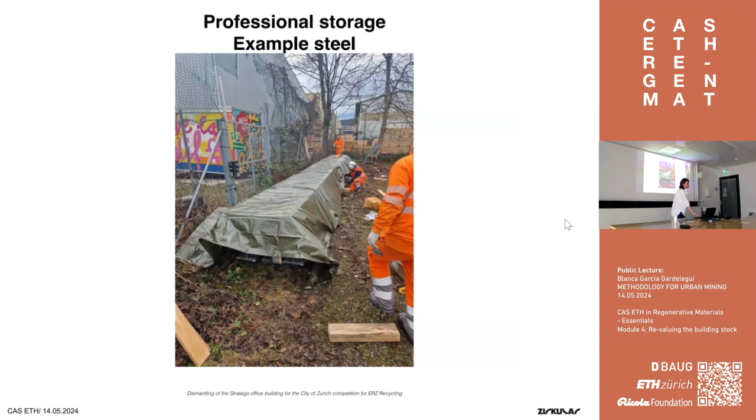And this is the storage concept - something we also do for components, to understand how much area they will need to be stored. This is also important, so to assess when it's needed, we redraw them to try to understand how many square meters will be needed.

This is important also in terms of costs, because when you cannot bring it directly on site, you need to pay for storage costs - with public projects sometimes it's a bit easier, but when you need to pay, it's very important how many square meters you need to store this. Also, whether it's inside or outside matters, because inside space is much more expensive.

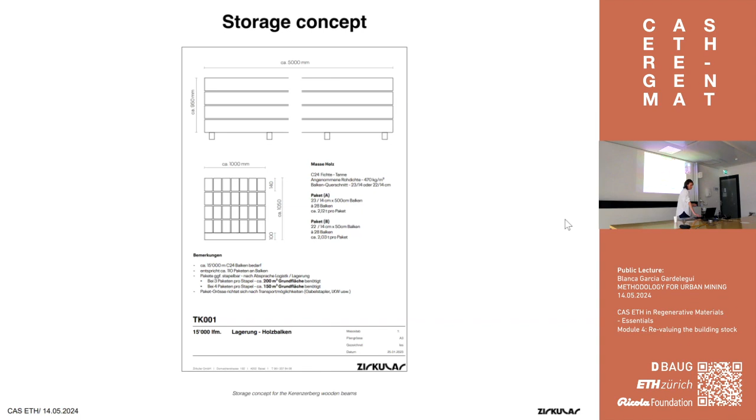And then the logistic concept - for example, transporting components by train can reduce CO2 emissions a lot more than transporting them by truck. So with the concrete plates, at some point we tried to transport them by train, which would reduce CO2 emissions a lot, but of course it's very difficult. Still, it's important to keep this logistic concept in mind, that you also design the process.

This is also an image from the ERZ Recycling Center. The idea here is that between every 2 concrete plates, we needed a wooden beam. At the beginning, we tried to have this reused too, because it felt weird to reuse concrete plates but get new wood. But in the end, it was very, very difficult to find.

It was very difficult to find reused wood exactly on time for when the concrete plates were coming. So what we thought is, okay, if we take local wood, even if it's new, we can then reuse it in the project as well. So now we have 500 linear meters of super beautiful wooden beams, which may not look so beautiful after 2 years under the rain, but still can be reused in the project. Now we're trying to implement that.

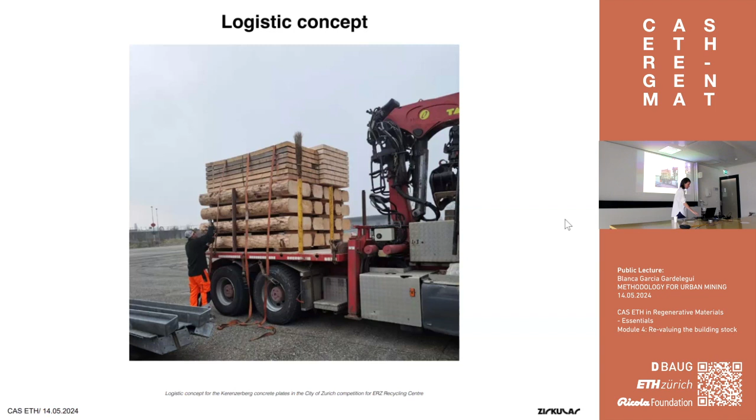The material passport is what comes once the components are already dismantled, transported, and stored. We do a material passport so that in the future they can also be reused. This is an example of the City of Zurich refurbishment of Kindergarten Möslistrasse, and these are some of the Bauteil passports. In the Bauteil passport you can find all the information, for example if there were any toxic products, from which year it was dismantled, and all the information you need about this component so that you can reuse it in the future, or even for maintenance. It's also important to have this Bauteil passport for maintenance.

And then there's also the Übergabevereinbarung, which is a contract. We have developed a lot of this legal framework, and this is a contract so that the component can be given from one owner to the next owner. This is also important so that the responsibility, the warranty, kind of goes from one owner to the other. This is also a topic.

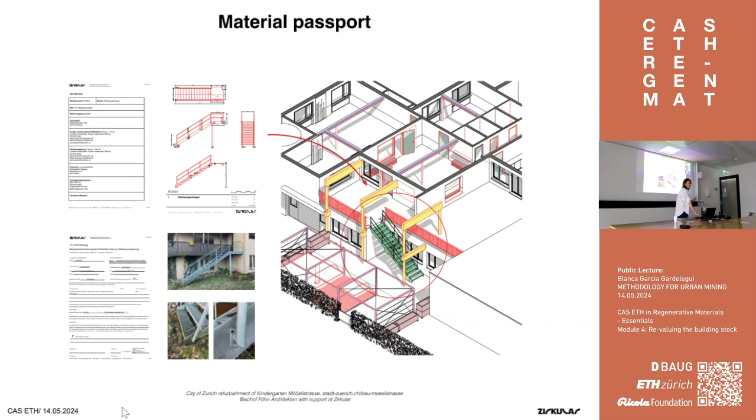And the tendering for the new installation, this I think was one of the questions before, and this is also a bit special. It's not the same thing, a tendering for the installation of a new product as the tendering for the installation of a reuse component. Depending on which component—if it's a lavabo, it's almost the same, but if it's a steel structure, it can be much more different. How to design these tenderings is something we're now doing in different projects.

To finish the circle a little bit, this was a bit the question that we discussed: what are the challenges for the next 5 years? What are we seeing, where are we going, and what are the next steps?

One of the biggest challenges with reuse is the uncertainty. It's very difficult to really plan 100% with reuse. It's not like when you get a new product and you're designing exactly what you want—here you need to accept some things that come with the material, and sometimes we run into surprises.

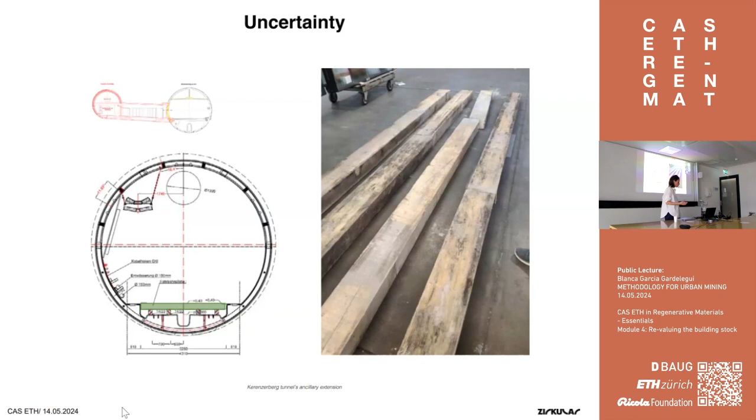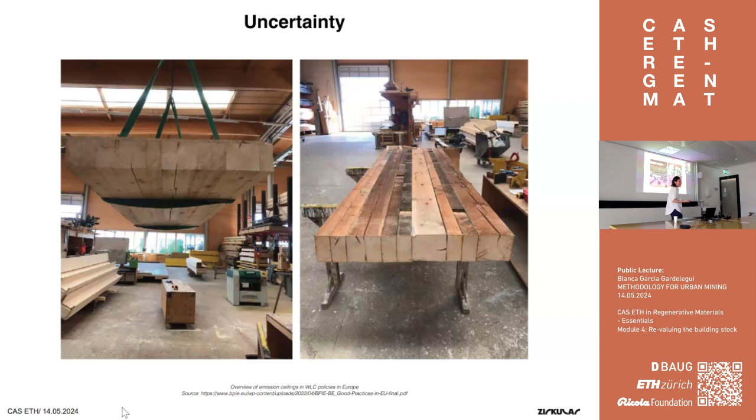For example, this is the same Kerenzerberg tunnel, the ancillary extension. As I said before, there were 15 kilometers of wooden beams, and we tried to reuse them in different projects. After doing many tests—because they had been for 1 year in the underground tunnel, they had a bit of moisture and a bit of fungi. Because of this, the wood engineer said it was okay if we dried them, but it was a question whether we could really reuse them, for example, in public programs indoors. This uncertainty is something we see in many examples of components that, after we did some tests, did not move forward. This is one of the mock-ups done with CAS Architects, where we did a Brettstapeldecke with these beams to test them before we found out that they had this Pilze (fungus).

Hopefully, as we were discussing, if the big producers take back their products, then you will be able to buy steel from Eberhard, for example, new or reuse. Because of that, it will be easy to make a tendering where you ask for, I don't know, HEB—you say exactly which profiles you need and that they want to be reused, and then these companies will apply to the tender. This is the idea of where it will move in the future. Maybe right now it's still a bit difficult, but it's where we think it will move in the next years.

And then the logistic necessities, that is also a challenge, like I've been saying. In some public projects we do receive available storage, but in others we don't—we have to pay for it. And this makes everything a lot more difficult, of course.

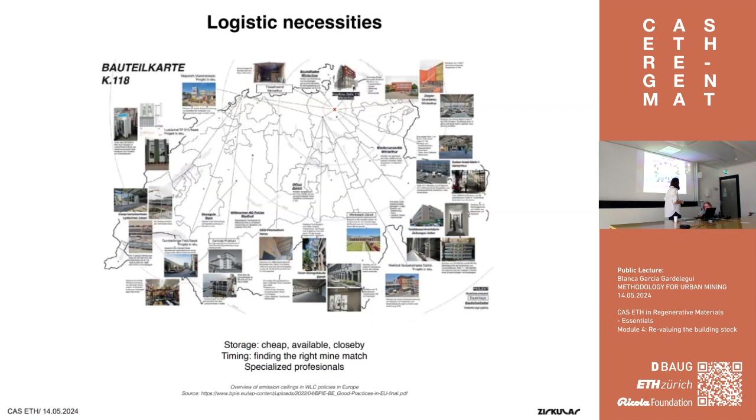Then the specialized professionals, like I said, and of course the timing. And then of course the political instruments.

One of the political instruments already being put in place is thresholds for embodied energy. Right now we are at, like I said before, 660 kilogram CO2 equivalent per square meter, which is 11 when you divide by 60 years, the average. This is right now the average for construction of new buildings in Switzerland.

The idea is that by 2050, we are here. So we're at netto null, 10% over netto null.

When we look at the case of K118, the building you'll visit tomorrow, which is a renovation using an existing building, all reuse and biogenic materials—wood, straw, and reuse materials with very little concrete. For example, there's concrete you'll see tomorrow in the steel beams because of Brandschutz, because of fire regulations, but very little new materials.

And when we look at that, K118 is at 4.1 kilograms per square meter. And that means that by 2030, all buildings will need to be at the same level as K118. That's quite challenging. That's a big challenge. How to do that?

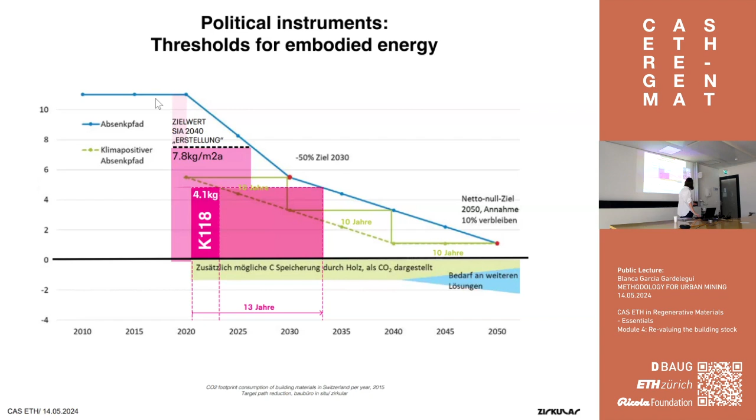And that's why I think there are mistakes, or there's optimizing to be done. But I think the important thing is to move forward.

And other political instruments, as I was saying—also building screenings and disassembly mandatory. This pre-demolition audit, which Zirkular developed 2 years ago, makes disassembly obligatory in Germany. And there's also the EU taxonomy for sustainable finance, which we're also expecting will be an important change.

And then the legal framework is also an important one in terms of process, for example for the project credits, for the warranty of reuse components. And if you're interested...

There's a project done between Zirkular, baubüro in situ, and the ETSAB. It's online, and there are many different documents developed in terms of warranty process, very important for the legal framework for reuse. If you're interested, I left the website there.

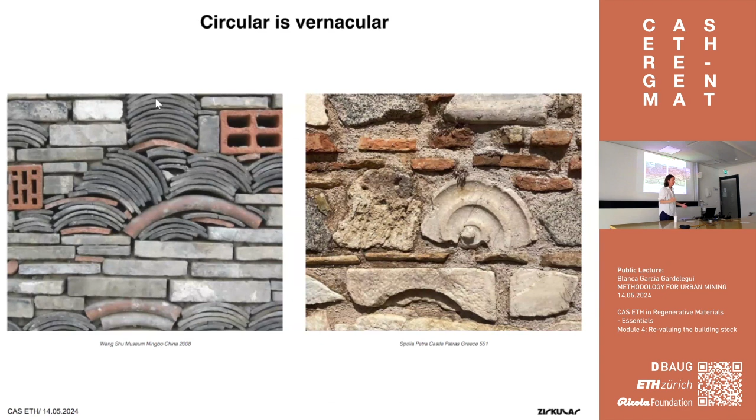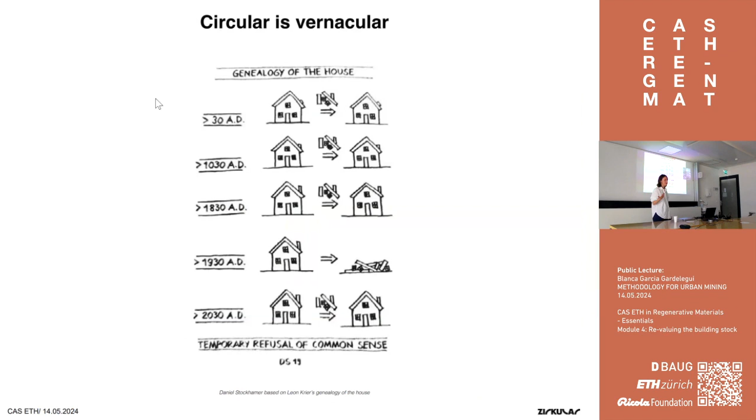Just to finish, what we're doing is also not something new. That's a building from 2008 and a building from 551. Basically, we're not really innovating—we're kind of only fixing what took place in the industrial revolution. Since the industrial revolution, we're trying to go back with what makes sense for us, and hopefully we can manage it.